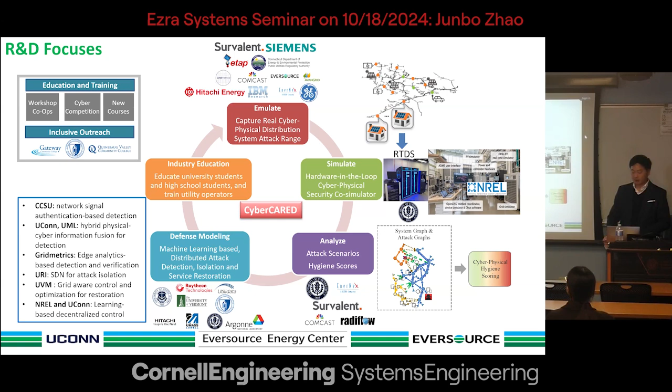So we are going to build some of the website, which will be quite widely accessible to other folks. This is one major initiative we're currently doing for the Cyber Security Center, DOE Center.

The other one is really more complicated. We're trying to merge together climate change, power energy infrastructure, and also human in the loop, which is related to the communities. Nowadays we are seeing a lot of extreme weather events. The problem we are thinking is, given weather forecasting, can you forecast how the critical infrastructure are going to be affected? For that, we're going to develop a really granular outage predicting system for the distribution circuits.

For example, for tomorrow, you are going to have a big snowstorm or hurricane event. Then we're going to tell you, for this county or for this circuit, how likely or how many customers are going to get outages. And from there, you can inform the stakeholders or communities: I need to put some certain critical needs for the community, or how we are going to dispatch the crew members for faster restoration.

So this is one major piece of work. It has been there under Eversource Energy Center for many years, but we are pushing to the next level, from the county level to the circuit level, which will be really, really relevant to the communities and for the local governments. And then on the other hand, we are going to install more grid edge intelligence sensors.

For example, the Gridmetrics data, they are coming from communication companies, like cable companies. If you drive through the road, you'll see power lines, three phases. There are also, in parallel, some cables alongside the power lines. Those cables are powered by the electric poles. And at some certain aggregation points, they have measurements.

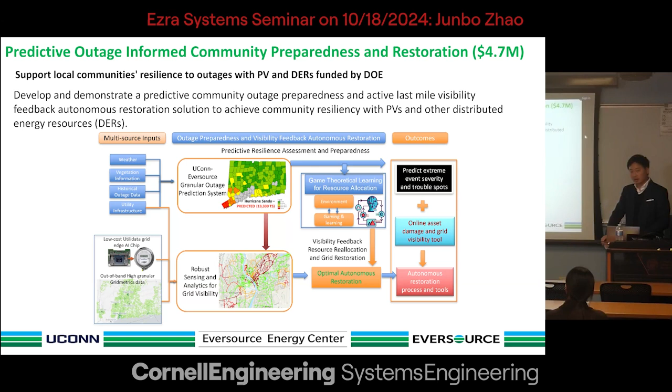The third one, which has been pushed so greatly this year from the FERC level, Congress level, even at the state and local government level, is how we're going to better utilize the capacity of existing transmission assets or transmission lines. The technologies the industry are pushing are related to dynamic rating as well as advanced power flow controls. So for this project, we're working with local utilities like Eversource in the New England area.

We're going to install dynamic line rating sensors along this transmission line to better understand the big offshore wind integration into the grid, and whether you can really utilize the transmission capacity without investing in new transmission lines. Because new transmission lines are very time consuming, have regulatory challenges, and also might face opposition from the communities. So a better way to utilize the infrastructure is to measure what is going on in real time and then feed that information back to the advanced controllers.

So we are going to collect more information through these initiatives. Actually, this project just got started, but we're excited to get the first experiences in our region, especially for offshore wind. We are the first in the country to study the impact of offshore wind on transmission lines in the field, which I'm very excited about.

And for more information, I think we recently had an article accepted in Nature Reviews Clean Technology. So you can have more information on what grid enhancing technologies are, and the development across the world. We have a lot of data and stories across the world you can take a look at.

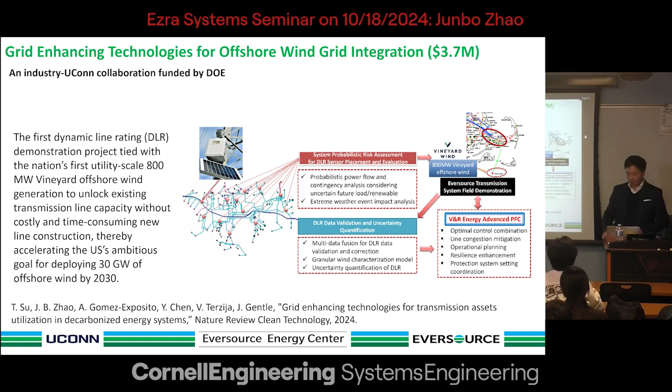For today's topic, really the first challenge we want to address is renewable energy integration. It's going to be accelerated so much. While integrating such high penetration renewable energies, you have to handle a couple of challenges.

First of all, those are power electronics-based devices. They likely do not have any inertia, very different from the synchronous generator, which has lots of inertia. And that gives you fast dynamics. Also, those are weather dependent, they may have huge uncertainties. How are you going to manage those uncertainties? So this is the first big challenge.

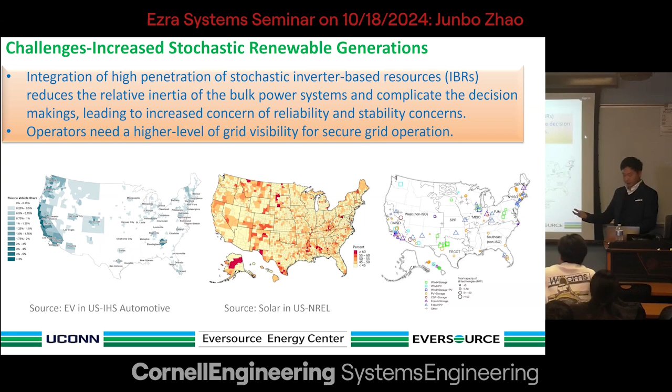And one particular event related to that is the 2016 South Australia blackout. Because that particular system had very high penetration of renewable energies, and due to that lack of inertia, the rate of change of frequency was changing too fast. The protections and some of those controls are not designed for handling such fast dynamics.

At that point, that gives us a lesson. First of all, you need to plan or do preventive types of control in a very fast manner, or emergency controls. Our group works a lot on preventive control - before an event happens, 50 minutes ahead, what type of actions you can take to prevent this type of event - or later on, emergency control. But this is another topic which we're going to work on.

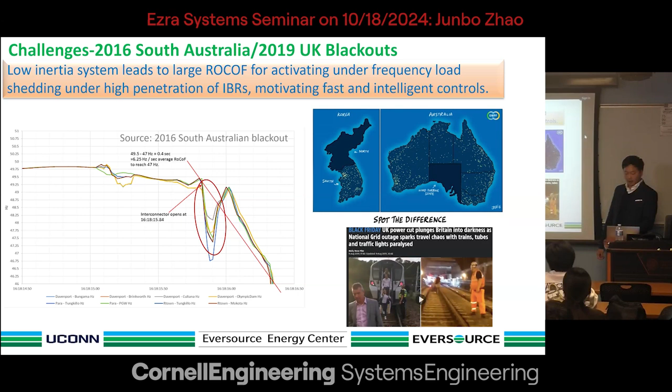From the inverter-based resources perspective, at least some of the major events happened in the past few years. For example, this is a report from NERC. It captures the real events - you see the disturbances in the grid can cause cascaded outages for the big distributed energy resources like solar farms.

You see solar PV resources, some of the batteries may be tripped, or even some oscillations between the inverter-based resources and the natural gas facilities, and they are causing certain very complicated interactions. We have to better understand that and design some operational mechanisms to prevent this type of impact to our grid.

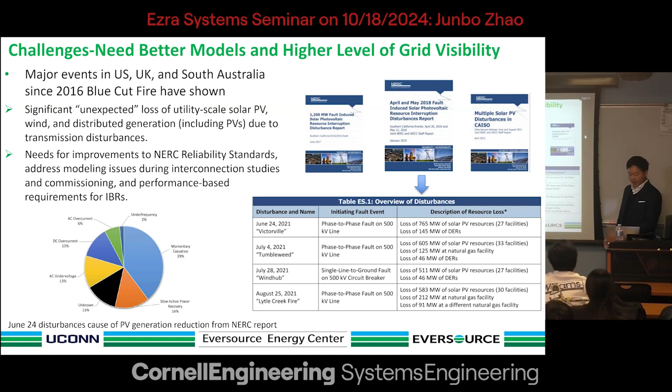The other thing about IBRs is that we're not always criticizing inverter-based resources as not good - in the meanwhile, since they are power electronics devices, if you do it right, they can provide a lot of services. Through controls, you can provide some inertia, frequency support, voltage support, and so on. Those are good things, you can take advantage of it.

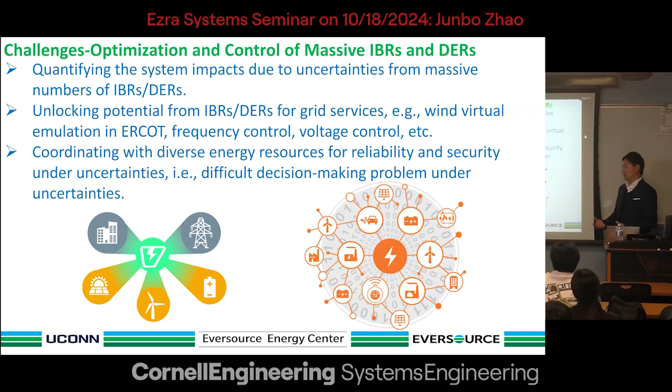But from the optimization and control perspective, those really have a high scale, meaning there are millions or even hundreds of millions of devices you have to manage some day. This is really a huge challenging problem where you have to make decisions under uncertainties - decision making under a lot of uncertainty. How are you going to manage those from the security and reliability perspective?

From the uncertainty perspective, I want to show one example here. Even from the renewable prediction perspective, since this is weather dependent, you are going to have uncertainties associated with your forecast. This is short term - if you look two weeks later, the uncertainty may be even higher.

For example, I worked with an ISO. They told us if you forecast two weeks ahead for line maintenance, it may be subject to 40% or 50% uncertainty from the forecasting perspective. That's huge - you have to really carefully evaluate the impacts from the grid perspective.

So for that, from the resource perspective, even from the physical model perspective, for those inverter-based resources, they are black box models, and some of the parameters may not be accurate. Meaning that if you rely on models for simulation, as we used to do, you can have a lot of inaccuracies in your simulations. Of course, one straightforward way is if you have distributions, you just do a Monte Carlo simulation - sample the space, propagate through nonlinear models, and evaluate the variable of interest. That's something you can do very straightforwardly.

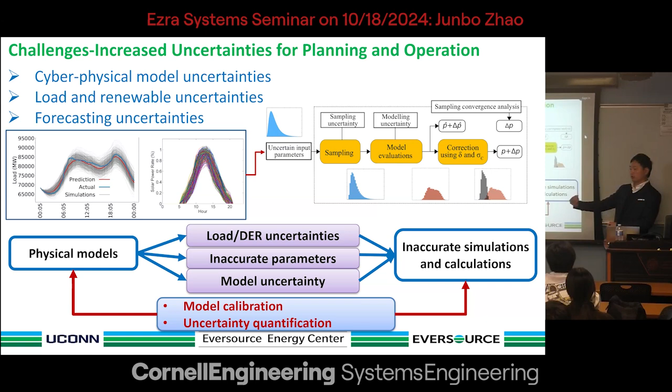But the thing is we're talking about operational planning, meaning every 5 minutes, every 15 minutes, and we're also looking at large-scale systems. Monte Carlo certainly is not the tool for us to get everything done within such a short term. So you have to come up with some more advanced approaches that can help you better predict the risks for the systems, and then put those risks into mitigation schemes so that we can make sure our system is still safe and secure.

A lot of people are trying to use machine learning and AI for that. But I want to give you some caution. Although we have been seeing a lot of data growing in the power and energy field, some of the data are even beyond the power and energy field, like weather, off-domain traffic data, gas usage, market data, water usage data. All those data are across different domains. You can say, hey, I have a lot of data.

Let's try machine learning to address some of the problems. That's fine, we're coming with this type of technology. But remember, we are addressing our critical infrastructure with safety and security as the first priority. Some of these approaches, you have to make sure you follow the physical constraints. There are limits you must satisfy, you cannot go above.

And also, we are not producing as much high-quality data as you are expecting in the power and energy field. For some machine learning fields, you have plenty of data, right? You can train a good machine learning model. But in the power and energy field, we certainly lack high-quality data. For example, if you're dealing with stability, we don't have much disturbances in the field, so how are we going to train a model that can give you very reliable outputs, right?

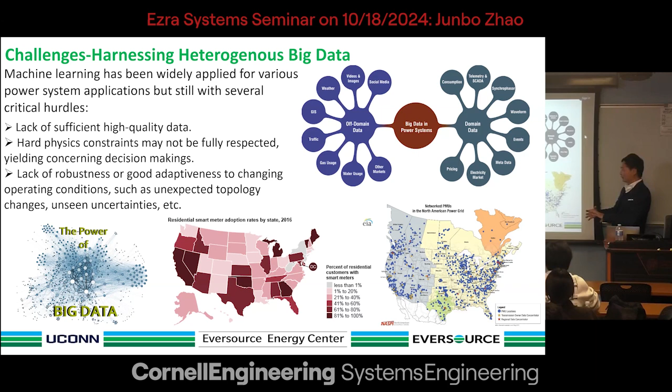And also, when you are designing the machine learning approaches, they have to be adaptive and robust to different types of operational challenges, like the topology might be changing for the graph. And some of the data may be compromised, or they may be attacked by a cyber attack, and so on. So you have to make sure those approaches have sufficient robustness to handle that.

So given all those challenges, you can put everything into this big picture, which is the cyber physical energy systems. You see, you have the model responses, which you rely on the model, you can simulate whatever you want. And then in the meanwhile, you have measurements captured.

It's very interesting. In the past, the power system planners or engineers used extensively model evaluations to come up with risk assessment, design and mitigations, and so on. This is what has been done in the past. But nowadays we see a lot of data or measured outputs from the sensors, so we're kind of shifting to another paradigm. Our model is not as reliable as in the past, while we're having growing data in our field.

So the paradigm is how you're going to better merge the data together with the model you have and come up with more clever decisions. And of course, this is also a decision-making problem under uncertainty. But you can kind of capture everything into this general framework, and that's what we are trying to do within our group.

For example, we're trying to develop some nonlinear dynamic estimation approaches to merge the data with the model, monitoring what's going on in real time from the systems. On the other hand, we're trying to use the power of machine learning together with physical information for risk assessment, optimization and control. And also, we're trying to make sure you can use some physical information together with sensors to help better identify cyber attacks.

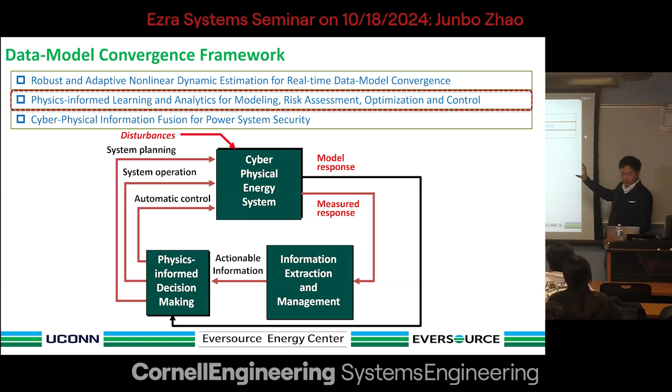Due to the time limitation today, I will only focus on the second mechanism or framework we have been doing, which is really how we are going to use AI together with the data and physical information to come up with better decisions. For that, I will specifically focus on how we are going to embed the data and machine learning information into optimization and control problems, shown in a more general manner, so you understand the theoretical development we have done, but those frameworks can be very general and applied to many other domains.

So to begin with, I'd like to provide a little background about optimization and control. For example, if this is a constrained optimization problem, the first approach for machine learning applications is, can you solve that problem many times, like using nonlinear programming or linear programming, and then you have labeled data. You train supervised learning with the mapping relationship determined. Next time when you have new operation points coming, you just input into your trained neural network and it gives you a decision point. That's a very straightforward way.

People have tried that, but again, our system is dynamic and changing, and every time there are unexpected topology changes or reconfigurations, you have to retrain your model.

And you cannot guarantee how the model is adaptive to different operation conditions. So that's really a drawback we have been seeing for direct supervised learning approaches for optimization and control.

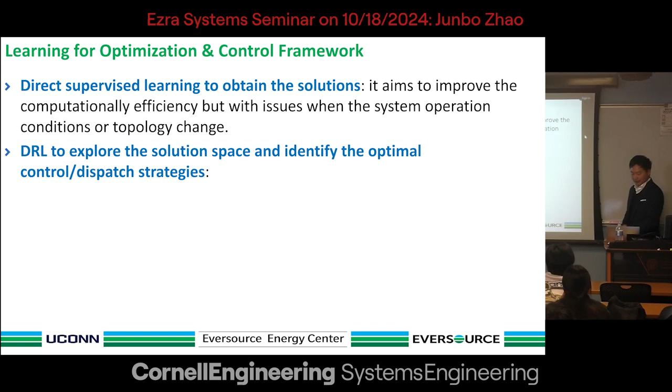and identify the control and dispatch strategies. For example, some of the ACOPF problems or preventive control problems can be formulated as a Markov decision process, and they use different types of deep reinforcement learning algorithms to solve that. Those are some of the approaches tried in our field.

But again, for DRL, you need a lot of data with labels, or even without labels. But certainly you need a lot of high quality data. Some people may use digital twins to generate additional data. But again, as I mentioned before, the challenge is that the model is more and more challenging to

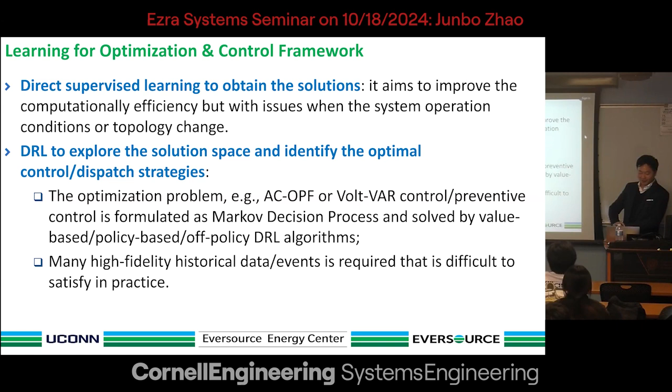model in an accurate manner. So that's really the challenge we have to address, right? You tried supervised learning, you tried DRL, and so on. But still, there are a lot of challenges we have to address. That's where we come up with this physics-informed learning for optimization and control.

So the key idea here is, if you look in general—later I'm going to present the general optimization problems—for those general problems, there are always some constraints that make the problem itself non-convex or very difficult to solve. So the other idea is, can we use some data analytics or machine learning to replace those very difficult to solve constraints in an easier way so that you can solve it. And of course, it depends on how you design that surrogate model or machine learning module, right?

And later on, you certainly introduce another problem. Originally it's the physical constraints—everything is white box. But now you are introducing a neural net, which is black box. And the original optimization problem becomes a hybrid white box and black box one. How are you going to solve this problem efficiently, right? That's something we have to think about. We have to explore that.

So for this problem, we first tried a very straightforward heuristic optimization. It doesn't matter if you have a black box model or white box—I just search the space heuristically and get some suboptimal solutions. This is the first way we tried.

The second way is, for those really black box models, can you derive some analytic information out of there? For example, if it's a nonlinear programming problem, if you can get the Jacobian and Hessian matrix out of that neural net model, you can use interior point optimization and embed it in a much better manner, right? It has some analytics there. That's good, we're happy about that.

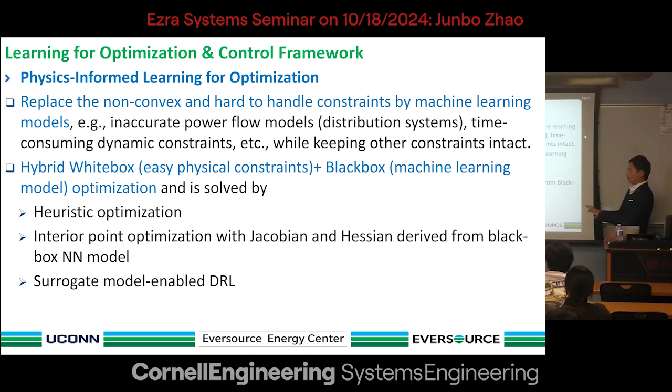On the other hand, you can build the surrogate model and let it interact with the deep reinforcement learning agent. It gives you more information compared to the original model because that's not accurate. This surrogate model embeds both the past history data with the inaccurate physical model. Certainly, you can generate more scenarios for DRL. We tried that—it also works very nicely under certain conditions.

But the last way we will really be pursuing is: for some of those non-convex constraints, can you relax them with certain assumptions to a convex one, so that you can get the problem nicely solved and get the global solution, at least for the new problems. And today I'm going to also show some of these problems here.

The last step is, we are using machine learning to replace some constraints. But how are you going to make sure that replacement is safe and secure? You say, okay, my prediction can give you 99.5% accuracy. But what about the 0.5%, right? The engineers are always going to question you: what will happen if that is really critical?

So we have to come up with some solutions. Let's certify the 0.5% which is safe and which is unknown. If it's safe, go ahead, it's fine. For the unknown part, I'm going to use a more conservative way, making sure at least my system is safe. So that's something I also want to share from the certifying-the-surrogate-model-predictions perspective—just make sure everything is safe, because we are handling safety-critical energy systems here.

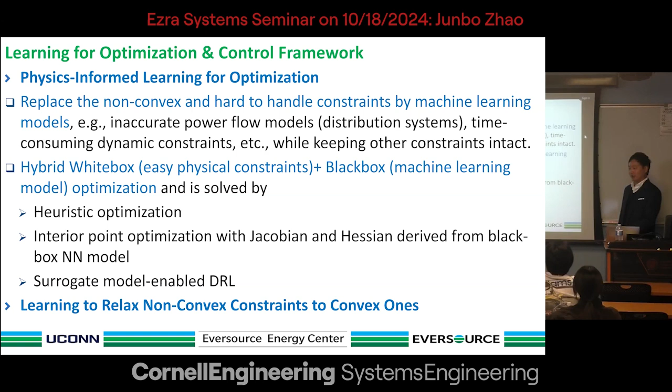So to begin with, this is a general setup. You don't need to really look at those equations here, but I just want to point out that this is a general optimization and control problem in power systems.

So you have the objectives, either minimizing the generation cost or you want to reduce the load losses or customers without electricity, or you want to reduce the curtailment for renewables. You want to have more renewable integrated in the systems.

While in the meanwhile, you have to satisfy the operational securities, like powerflow constraints, or some of the operational constraints like upper and lower bounds for some physical limitations. And the most critical or challenging one is the stability constraints.

This is giving you another dimension of the problem. It's governed by differential algebraic equations. It's very time consuming, and it's non-convex for sure. For that, for this very difficult to model part, we would actually come up with some learning-based surrogate models.

If you remember, I mentioned that this is giving us a lot of trouble. For other parts, smart people have done a lot of work on convex relaxation, very nicely done. But once they come to stability constraints, nobody has done much work there. It's so difficult, so we're trying to say, can we use a surrogate model based on machine learning to replace this very time-consuming, difficult to handle problem with another form so that we can solve it? That's what we're trying.

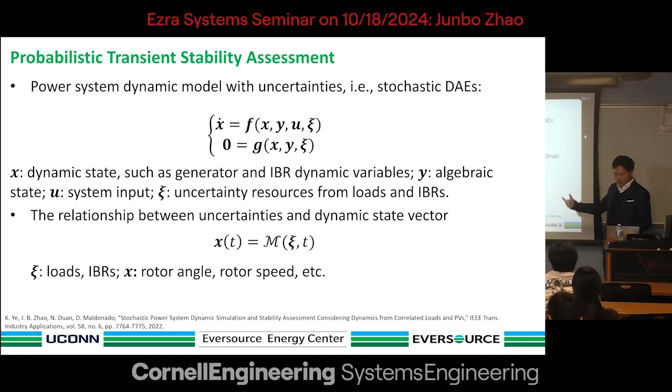The first approach we tried is, can we use some machine learning approaches to replace this very time-consuming process? This process needs to be scalable, meaning it must handle large-scale systems. So the first approach we tried is Gaussian process, because it naturally gives you a confidence interval or probabilities associated with your outputs, but we understand that this approach is not scalable.

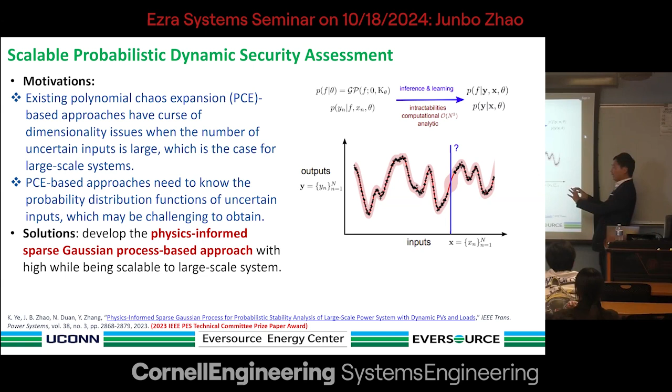You can also use polynomial chaos expansions, another analytical way to solve it, but it cannot handle high dimensional cases. So motivated by that, can we merge some information from the physics, like topology and some of the contingencies, embedded into the sparse Gaussian process? So I'd like to mention a little bit about the comparison between Gaussian process and the sparse Gaussian process.

A very quick recap. For Gaussian process, we're essentially trying to learn the functional distribution for the outputs. Here, for this Gaussian process, the computational complexity is n power 3, where n is the dimension of the variables of interest.

If you are using sparse Gaussian process, you don't need a lot of data to get the mean and variance. If you have those two, the function is determined. So can we use some other variables, like pseudo data, M pseudo data, that can approximate well the final Gaussian distribution you are looking for.

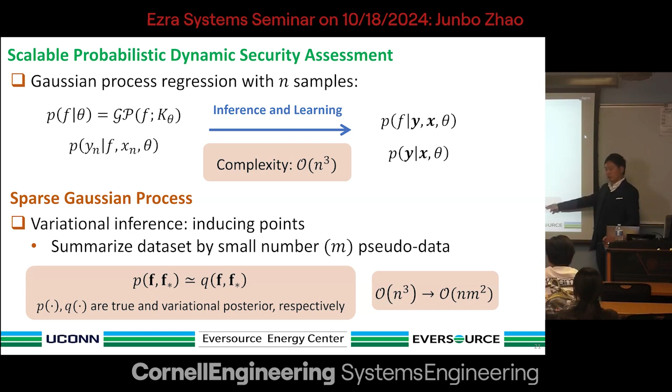This is something the machine learning community has done. They use variational inference to infer or approximate the probability distribution for the Gaussian. It turned out they can reduce the complexity to be linear with the original number of unknown variables of interest. M here is the inducing point, which is much less than the original variable of interest, so you significantly reduce the computational complexity.

And it turns out this is really the case. For example, we use the Texas transmission systems. Currently we're using 2,000 bus systems.

As you can see here, we compare with Monte Carlo, which may take more than an hour or half an hour to get done, because we are looking at every 5 minutes or 15 minutes, and you have to get all those risks down at that moment.

In fact, it can be found that using the physics-informed sparse Gaussian process, 900 seconds is close to 15 minutes, which is good. And you can further improve that using more computationally efficient computers to get it done faster.

For example, these are the stability indexes. If it's less than 0, that system is insecure. If everything is above 0, it's secure. This probability distribution gives you a nice indication of how much probability I'm going to have trouble, so you can control this part to keep a stable system.

So this is the first thing: we come up with a surrogate model that is scalable and handles the risks induced by those uncertain parameters.

So what are we estimating? What is the accuracy? What problem is solved here? It's the transient system stability indexes. I'm going to get the predicted or calculated transient system stability indexes. The goal is to estimate the transient stability index, and to make sure this is done very fast and quite accurately.

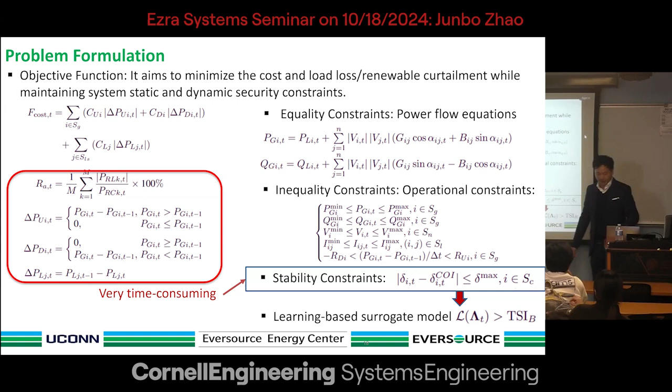So this is the first thing we've done, directly getting the mapping relationship from inputs to the system stability indexes, which is good, I'm happy about that. But this framework is not general enough, meaning you can only evaluate certain scenarios.

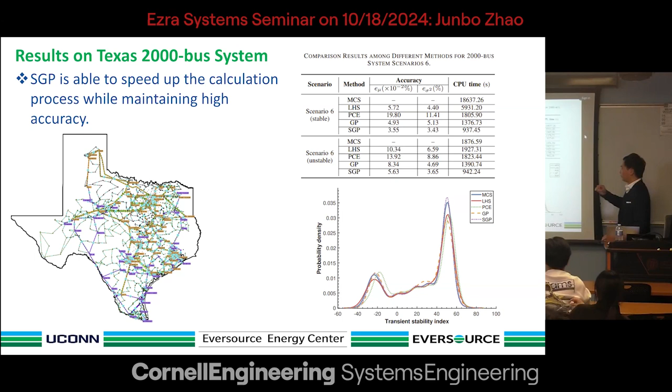The other problem we are looking at is: can you get the direct prediction of the system dynamics with all the state variables predicted? With that, you can calculate all the stability indexes you are interested in, right? That would be a more fantastic way.

So we formulated the problem as: give me some of the inputs, measurements. Can we input those disturbance data into the surrogate model? I can give you the trajectories for all state variables, and from the state variables you can calculate whatever you want with different types of constraints.

So for that, we further improved the sparse Gaussian process, for example in an extremely high dimension. The first thing is we want to reduce the state space, the feature space. So we use deep kernel approaches to extract the key features in the latent space, reducing it to a very small dimension. That small dimension can be effectively handled by the Gaussian process, less of a burden. I think that gives us the power to ensure this approach can handle very large scale spaces.

I think we use these approaches for thousands and tens of thousands of systems, to better manage the significant outputs of a number of outputs, as well as the high dimension from the state projection perspective.

What is the input here? The input is a PMU measurement, capturing frequency, voltage, real and reactive power measurement captured by PMU measurements. When there's a disturbance happening on real time, you give me the inputs within a second, of course.

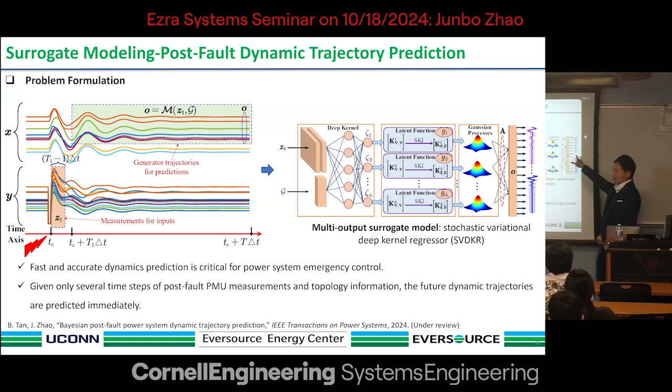You can predict the trajectory for the dynamics, whether the system is stable or not. I'll show here, for example, we're going to have a detector to see whether the system is okay. All the oscillation can be damped out, which is good. I'm not worried about it.

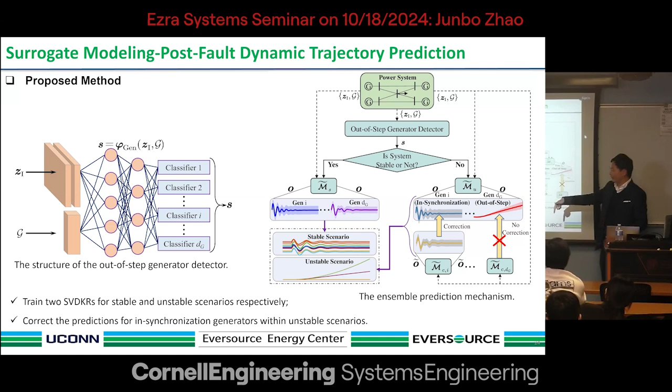But if you predict any out of step, meaning the system is unstable, you have to take immediate actions. That's where the time matters. Within a couple of seconds, you have to get the control actions done. Otherwise, the system may collapse. So this is really a strong motivation - you have to have a very efficient surrogate model to give you that type of information.

And we tested in the system. Here you see on the left-hand side, since it's a Gaussian distribution, you still have nice confidence intervals associated with that - you can have the confidence interval for the predictions. For the unstable cases, we can also clearly indicate that the system within a couple of seconds is going to be out of step, meaning the system is going to be unstable.

So you give that information within milliseconds, actually at least comparable with the PMU sampling rate, which is good. You have the time to do emergent controls to maintain the system stability.

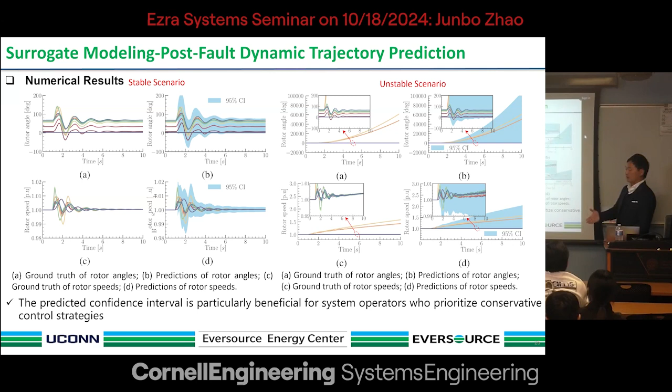So up to that point, I mentioned a couple of approaches - of course, I just listed two examples - of how we're going to come up with computationally efficient surrogate models to replace this very time-consuming part, and also you are going to have like a matrix type of operation, a black box model here.

Now let's look at this optimization problem. You have the stability constraints nicely reduced into a very compact form here, replacing this part. But still, this is an optimization problem you have to address, and it's a black box model.

Again, the first approach we tried is, can we just use a heuristic optimization? There are many different versions, right? The advantage here is that even using heuristic optimization, because of the neural network surrogate model, every evaluation is so fast compared to the time domain simulation here. So at least the benefit I can get is accelerating the optimization problem itself.

So we tried using heuristic optimization approaches and input into that preventive control approach. We can see it's good - it's conservative, but it gave you control of the system into a stable status.

Yeah, I guess if you could go back to the constraint - I'm trying to understand, so if you surrogate replace the left-hand side, how would you guarantee the constraint satisfaction in that case? Yeah, so here you can reserve a little bit of margin. You can relax the safety margin a little bit more, make it more conservative. Or something. Yeah, you make it more conservative here.

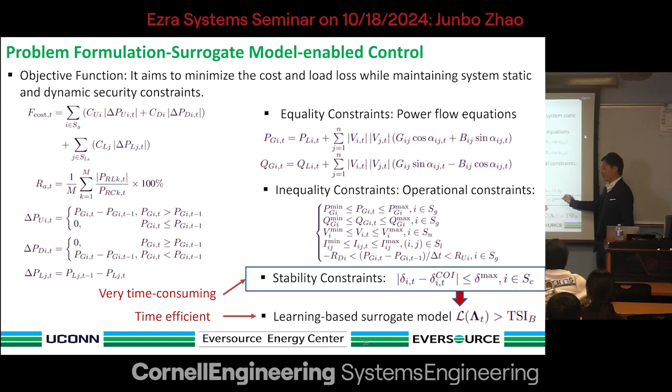Yeah, sure. I think later on we're going to elaborate how we're going to improve this process, because we tried the first step, right? We want to see whether it works or not. So at least here we find out, okay, it gave you the benefits we were expecting - accelerating. That's the first benefit we see.

The other thing is that I'm not happy about heuristic optimization - I don't have any guarantees there. But if you look at the problem itself, it's still like an optimization problem you see here. I'm still having a surrogate model there, represented by deep learning, right?

So for the optimization problem, other constraints I can easily handle with existing development. The only challenge is about this: if you can derive analytically the Jacobian and Hessian of these constraints, you can use interior point optimization to solve it - that's the objective we're trying to solve. So can we derive the Jacobian Hessian for this black box model? That's the question we want to answer.

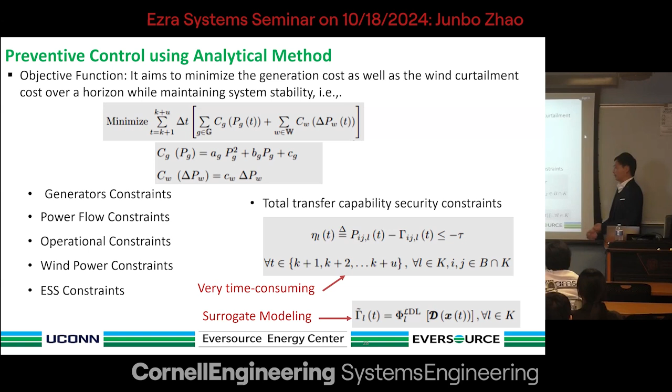And they have this dynamic version, which seems similar to what has been done here. Did you ever do that? Yeah, for this part we give 2 examples, but the approach to how you formulate the surrogate model depends on your problem setup. It's quite broad, but we want to bring the idea that you can have a surrogate model to help you. You can choose different machine learning approaches depending on your problem setup. So, back to the problem, if you can get the Hessian and Jacobian from this original problem, you can solve it in the interior point optimization.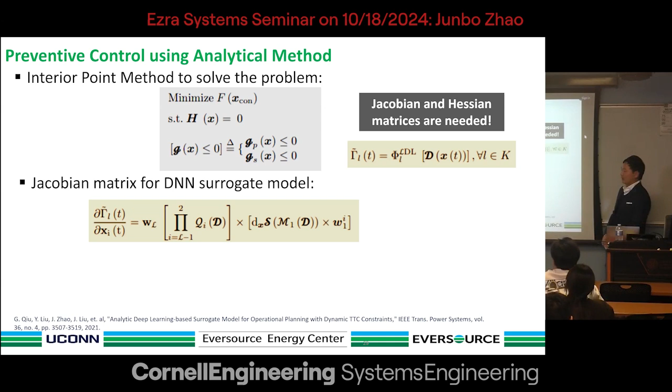Can we really do it? Yes, of course, depending on the structure of the deep neural network. If it's using certain activation functions, like ReLU functions, you can derive nicely that you can do the forward propagation. You can derive analytically the Jacobian matrix for the deep neural networks. You can also derive the Hessian matrix back and forth. Then you can have the second order, analytically done, which is great. I have the analytical Jacobian and Hessian matrix, so my whole problem I can solve using interior point optimization. It has certain analytics there.

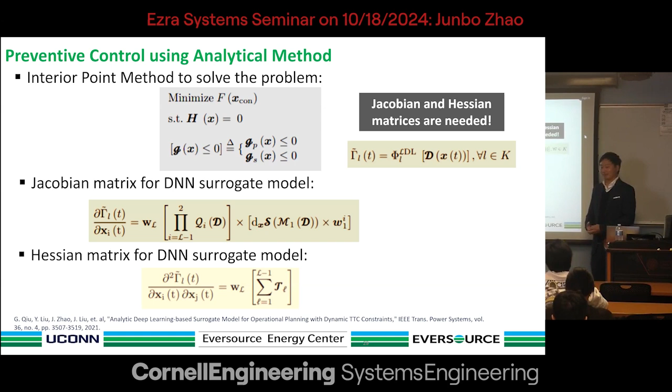I'm very happy, right? It's much better compared to the heuristic optimization. So this is the first.

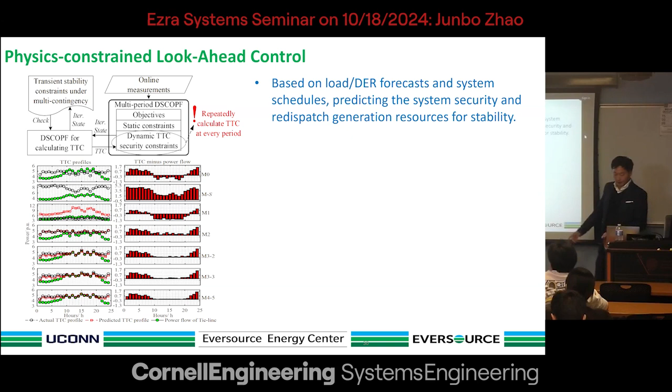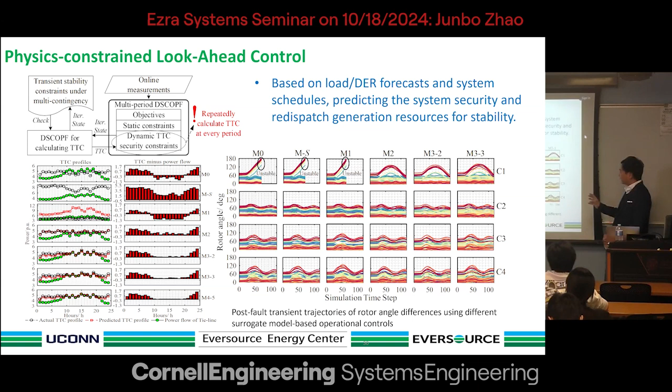And one very interesting finding from the derivation is that we have the Jacobian. Normally Jacobian is related to the first derivative, and that is related to the sensitivity indexes. So I can look at the system stability margin and the sensitivity between inputs to the margin. Some variables are very sensitive to the stability margin, and those factors are very essential. So I can control those essential variables to come up with a solution. That was really a surprise to our development. You can purely rely on the sensitivity to come up with decisions to mitigate the risk of the systems. This is something very interesting, going beyond our original design, but we find it very useful.

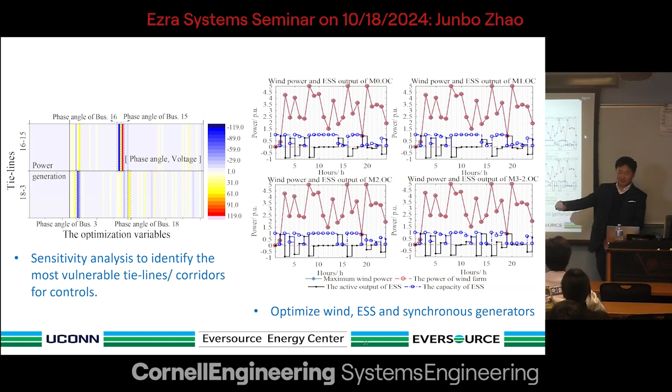So we advanced a little bit further. We have a little bit more analytics, right? But because that prediction, if you're using deep neural networks, is deterministic, meaning you give me the prediction but there's no uncertainty, no risk associated with that, I wanted to improve that process. So later we tried another approach, using deep neural networks together with Gaussian process. The beauty of using Gaussian process is you still have uncertainty quantification, and the Gaussian process gives an analytical Gaussian distribution at the end.

So for the normal distribution, you can convert the chance constraints into an analytical form. For example, if this is a probability constraint, it's nonlinear and normally non-convex, so you cannot solve it directly. But using an analytical way of transforming it into a deterministic form through the Gaussian property, the original chance constraint problem is now converted into a deterministic optimization with an analytical solution. You also have the risk quantified much better compared to the original DNN approach. And for the Gaussian process, you can analytically derive the Jacobian and Hessian, much better compared to the DNN approach.

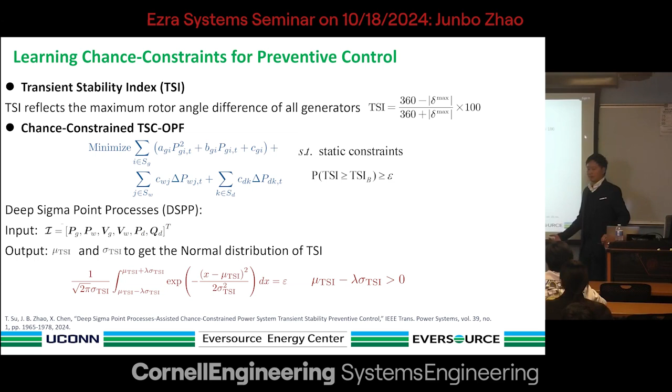So we tested it. We found that from the TSI, or transient stability index, perspective, we can quantify the risks for that stability margin prediction. We embed this prediction into the decision-making process, the chance constraint optimization. You see, originally the system has stability issues, but after control, everything is back to normal. I think it's desirable, right?

Which is great, we love it very much, but you still have certain assumptions here. The system stability index must be well captured by the Gaussian distribution or Gaussian process. But what happens if they are not?

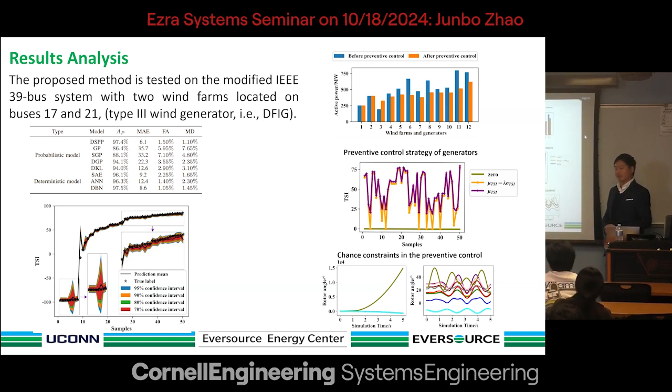Since there's still a nonlinear optimization problem, you may have convergence issues. So the question we are asking ourselves is, can we make the constraints into a particular form where my control variables and system stability indexes are convex with each other. I don't necessarily need the whole surrogate model to be convex, but I'm interested in whether my control inputs are convex to the control variables or the stability I'm interested in, because I want to make sure the optimization problem converges.

So that's where we find some advancement in input convex neural networks, which were originally designed to make sure all the outputs of the ICNN are convex to the inputs. But this comes at a huge cost - you have to train this model, and it's very difficult to converge for large scale systems and complicated problems.

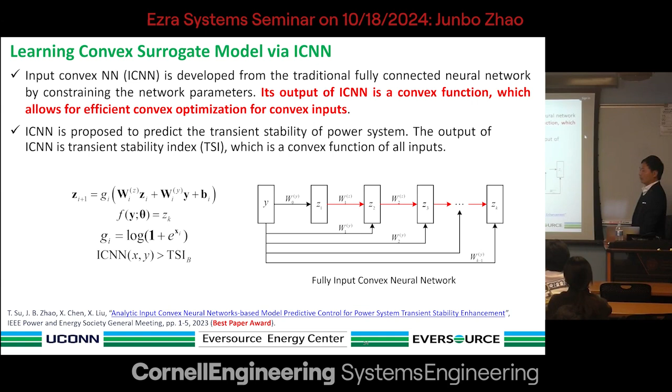So we came up with a better version. Can we just make sure the structure is partially convex, meaning some of the inputs I want to control are convex to the outputs, while for others I don't care, I don't want to control them. So we design it in a particular manner to make sure our control variables are convex to the system stability indexes, and then we put this surrogate model into the original ACOPF.

And ACOPF can be relaxed through convex relaxation, so the whole problem now is convex, so I can solve it. So we tested this here. The results are in this paper, but due to time I'm not going to elaborate, but certainly we got all converged results.

It's 100% guaranteed to converge, and you can certainly put some constraints there to make it a little more conservative, but at least it gives you 100% converged results. It has not been fully resolved though, because for those ICNN or PICNN, they cannot give you 100% accuracy for the surrogate modeling. As I mentioned, you can get 99.9% accuracy - what about the 0.1%? If that's an extreme event, you cannot work.

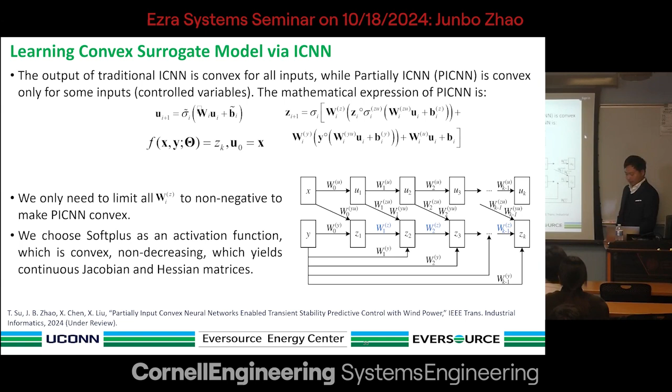So engineers are very cautious or conservative about that. So the approach we're doing is, can we certify those outputs, the surrogate model outputs? If from a theoretical perspective I can certify this really gives you accurate results, fine, I can go ahead. But if it's not securely certified, I'm not going to use this type of approach - I'm going to switch to a really conservative way, making sure our system is stable.

So there are some advancements in certification of neural network outputs. For example, the first one is the linear programming verifier - it's really the activation function that gives you nonlinearity in neural network design, otherwise there would just be linear matrix multiplication or linear combination. So we can use linear programming to relax the non-convex activation constraints into a linear programming problem, so I can verify, for example, whether it's at 0, 1, saturated, or in a linear relationship.

You can certify this from a theoretical perspective. Based on that, if I can certify my prediction is right, then go ahead, no problem. If not, I switch to another approach.

There are also other advancements like alpha-crown and beta-crown, done by mathematicians. They can achieve a tighter bound for the certification. For example, with alpha-crown, they go back and forth using gradient ascent approaches to optimize the lower bound, tightening it to make it more secure, quantifying and certifying the constraints in a good manner.

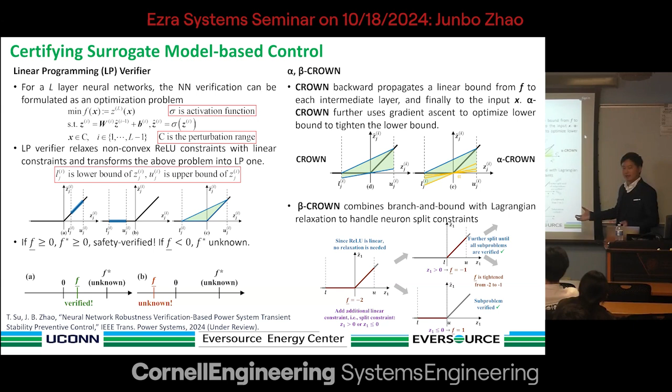For beta-crown, they combine branch and bound approaches with Lagrangian relaxations to certify the neural network constraints. But the whole point here is to make sure the neural network outputs can be certified - either correct, unsafe, or unknown, meaning I cannot certify it. In that case you have to switch to a conservative manner.

So this is the whole framework you see here. From the beginning, I have this stability estimation with Jacobian and Hessian calculated, as we've done before. Now let's certify whether those predictions are safe or not. So we go through the alpha-beta certification process, and if we identify the system is unsafe, let's switch to a conservative way and control the system. If the system is certified that the surrogate model is right, then just go ahead and perform the controls.

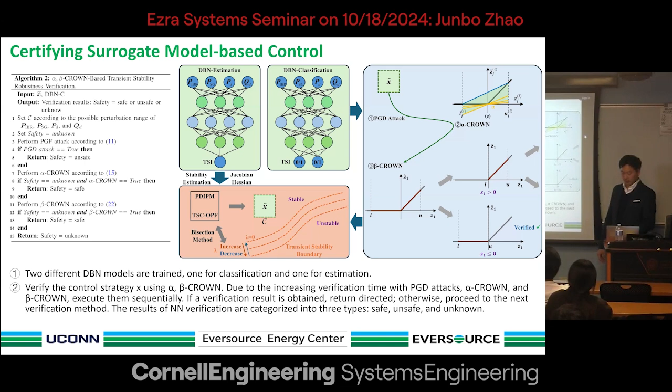So that's the basic idea here. We tested this in the North Carolina systems. As you can see, for the perturbation here, I can certify there are for some samples - some of the samples are unsafe, some of the samples are safe. So I can tell you the maximum possible perturbations, the out of distribution perturbations you can have, making

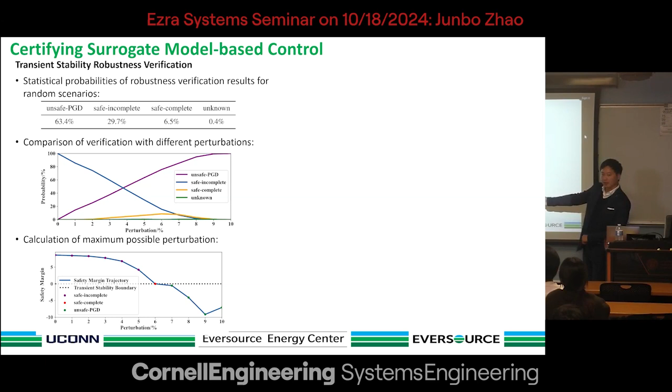sure I can still certify the surrogate model accuracy. So based on this certification, I'm going to take actions to control that. For example, here you see at the beginning I certify, oh, this is unsafe. I have to iterate, find another policy, and certify again. After 2 consecutive certifications, I find, oh, this is safe. You see this stability index is great.

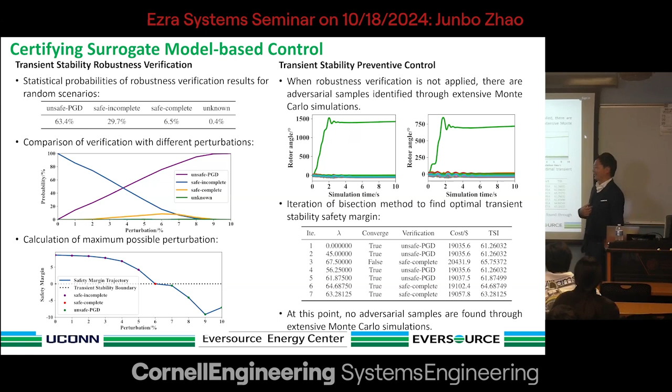So this part is done. That means now I don't have the risk that you are questioning even if the surrogate model is not accurate. But I can still certify - I know that this prediction is not accurate, so I can switch to a more conservative way of doing the job.

I don't think we have the time to go through this, but just at a very high level - in the original ACOPF or security constrained problems, we formulated an OPF problem, right? But the other way you can use the surrogate model is to interact with a deep reinforcement learning agent. It's not like solving everything analytically. For very complicated problems, you can use this surrogate model.

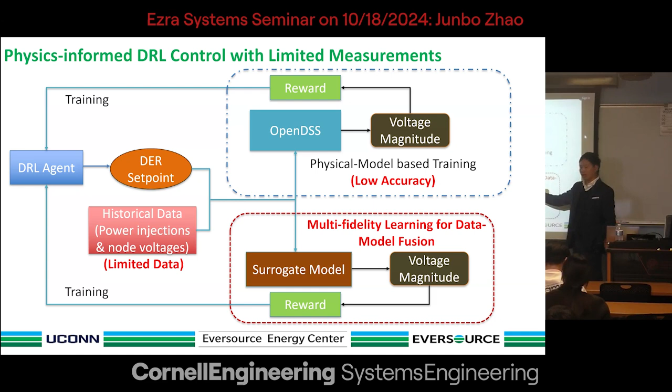For example, for distribution systems, it's very difficult to model accurately. So you can use some of the models, as well as the history data, to come up with a surrogate model. You let the surrogate model interact with the DRL agent and train the policy so that you can make optimal decision making.

For that surrogate model, it's designed particularly for these systems - you have lots of low quality data, and very few high quality data. So the question we are trying to address is: can you use massive low quality data together with a few high quality data to come up with a converged solution? It gives you still reasonable predictions. That's something we are trying to do, right?

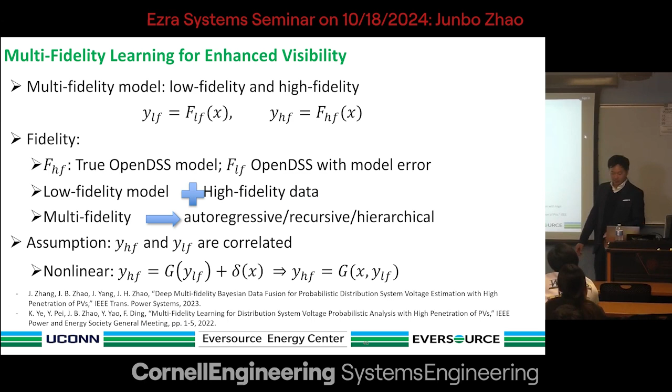So the approach we use is multi-fidelity neural network approaches. The high fidelity - the low fidelity data gives you a trend, how likely it's going to look like. While for the high quality data, we fine tune those trends so that at the end we can still achieve a high fidelity prediction.

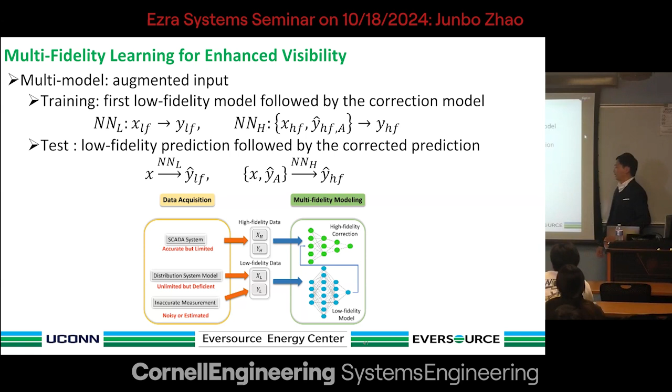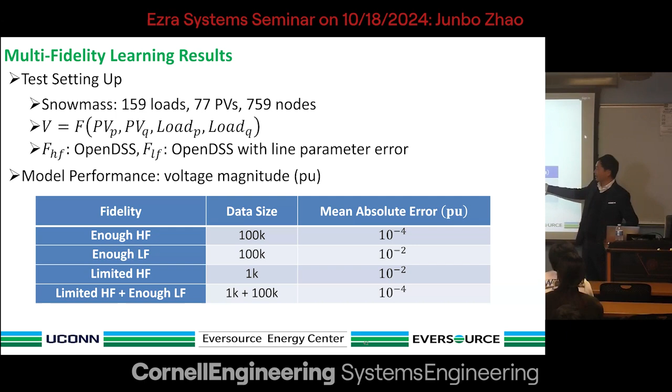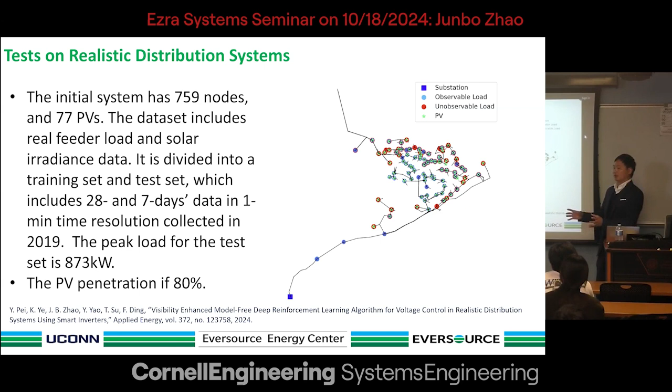So we train and get this multi-fidelity learning-based surrogate model, and then we interact with the deep reinforcement learning agent. For example, we use these actual systems from Colorado - this is an actual utility feeder with lots of solar integrated. The objective here is that I want to control the solar PV inverters so that I can regulate the voltage into a safety margin while minimizing the curtailment for the PVs.

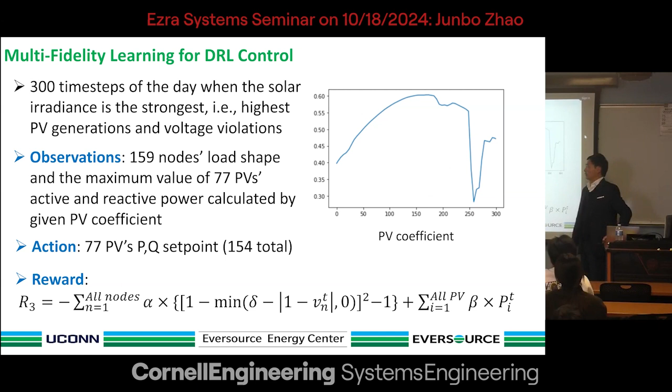Right? I don't want to lose a lot of PV generation. So that's the objective. So we categorize the system into the deep reinforcement learning problem. The inputs, observations, are load shapes, how the PV generation looks like, the maximum value of the PV output, real active power, and then the actions determine the setting point for the PVs. The reward, as I mentioned, is to minimize any voltage violations in the systems while minimizing the PV curtailment. So those are the rewards.

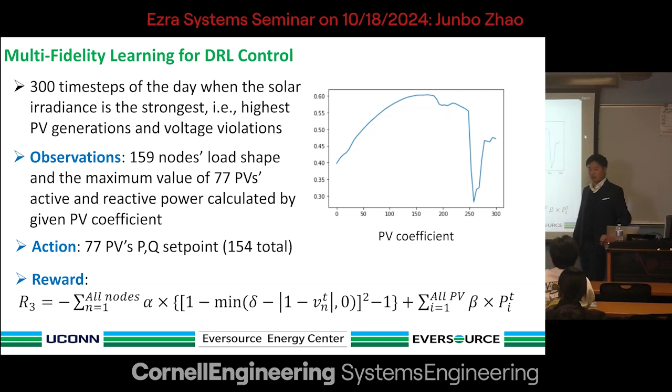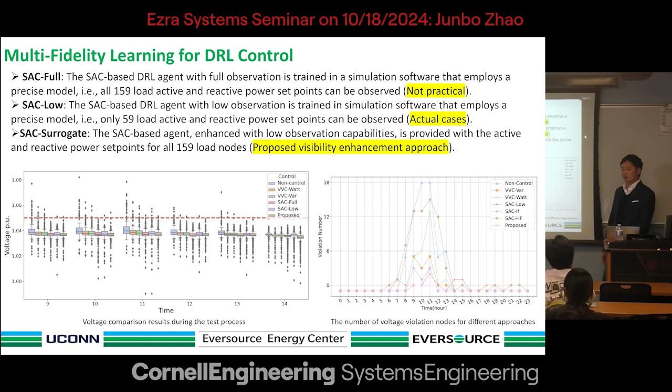We're still improving this process, and I think by next year we're going to implement this in the field. Working with grid edge control companies, we're going to test it in the field and see how we're going to dispatch the PVs and batteries together for managing the demand response, the voltage regulation, and so on.

As a summary, we find that learning a surrogate model to replace very complicated constraints, or reducing the complexity, can accelerate the computation process, as we showed in many problems or examples. The other way is that physical-based approaches can help you better design solutions that fit into your engineering problems. But there are certainly some gaps we have to address, as I mentioned before.

You have to carefully design the surrogate model with physical information for different applications. This design is different. The other one is that we have to make sure those surrogate models have sufficient robustness to the data quality issues. We haven't considered that data quality issue yet in our current development, so we are working to improve that process.

We are also trying to develop some approaches handling out-of-sample distributions, like unexpected changes to the system operation condition and so on. So this is still work ongoing. With that, I want to conclude here and open it up to any questions you guys have. Thank you, guys. Thank you very much.